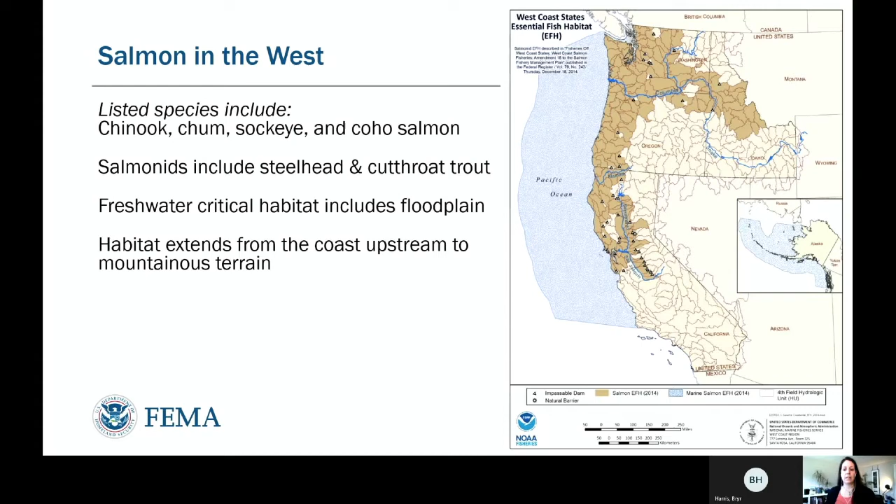These watersheds provide habitat for salmon upstream from the coast and into the mountains. Floodplains are important to fish because they provide shelter from fast-moving water during floods, and because the use of land near a river or stream determines whether fish will have the food, shade, and clean water they need to be healthy. So let's take a look at some of the communities existing alongside our salmon.

We'll zoom in a little closer to see the major channels for the freshwater habitat in the greater Puget Sound watershed. This map identifies each county in which NFIP communities are subject to the unique NFIP standards we're here to talk about today. In total, 122 participating communities are located within the Puget Sound watershed, and the participating municipalities on this watershed are shown in the map in blue.

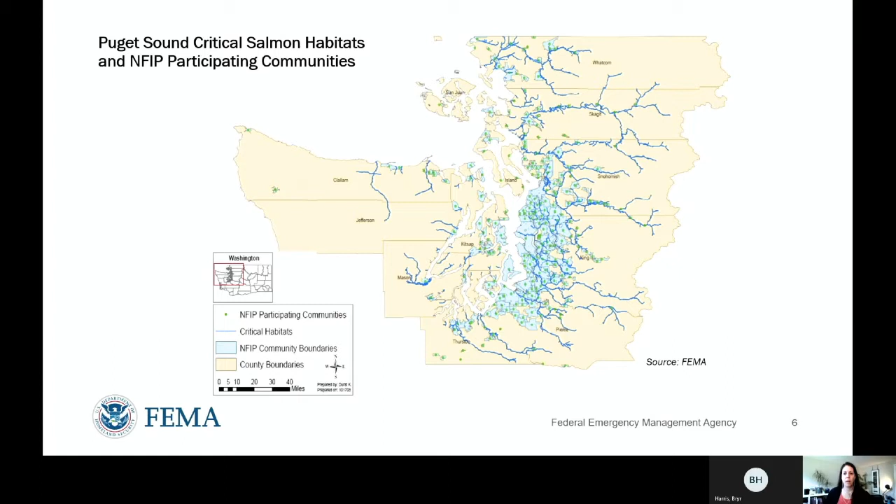The listed threatened and endangered species of concern in the Puget Sound watershed are shown here, and these are 4 salmonid species plus the distinct population segment of the southern resident killer whales.

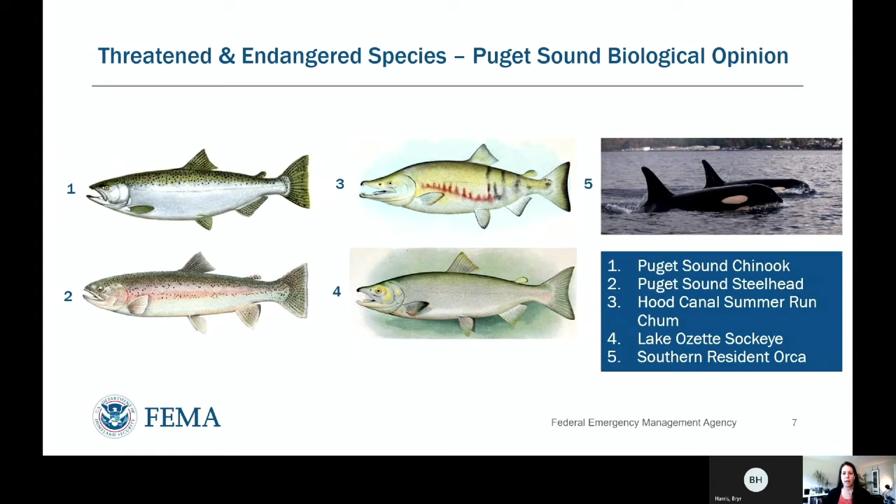Similarly, a separate biological opinion was issued by NOAA Fisheries for habitat impacts in the state of Oregon for the watersheds shown in tan here. Same as in the Puget Sound, the boundary of this impact is driven by natural and sometimes man-made obstructions, but the general area follows watersheds. The majority of NFIP participating communities within the state of Oregon actually fall within this boundary.

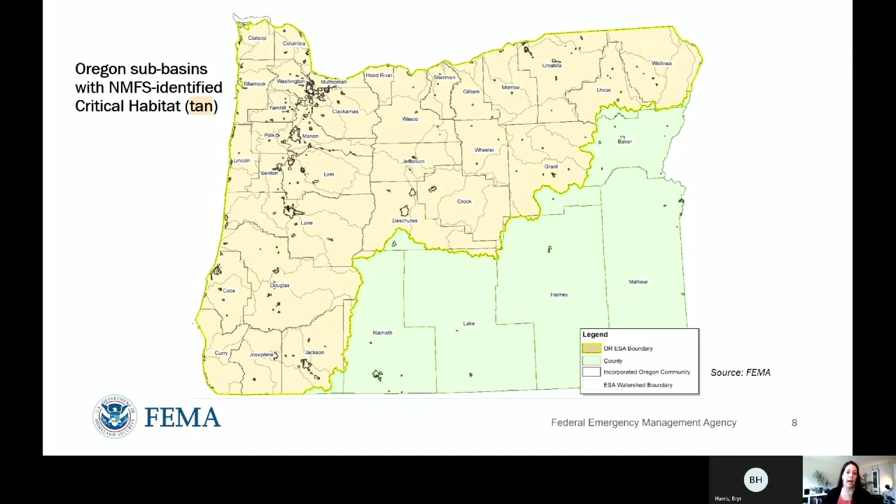So the species highlighted in the biological opinion for the state of Oregon are more extensive: the salmonids you see here, plus their subspecies, eulachon, which is a feeder fish, the green sturgeon, and again the southern resident killer whales are identified as impacted by the implementation of the NFIP.

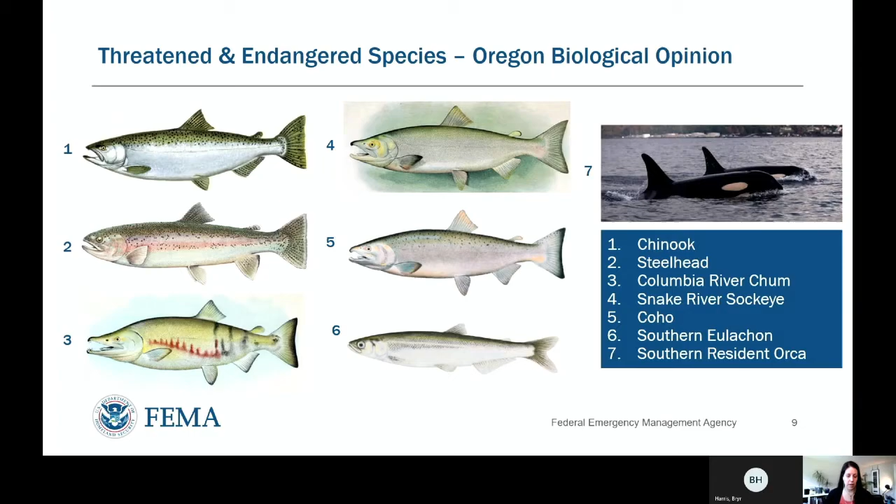So why are we talking about all of this? If you're not sure why the National Flood Insurance Program has to do with salmon, you're definitely not alone. It all has to do with the requirement of federal programs to comply with Section 7 of the Endangered Species Act. Let's dig into that a little bit.

As a federal agency, FEMA is required to ensure its actions through federal programs comply with the Endangered Species Act. The tricky part is that the NFIP is a voluntary program implemented locally by local governments. Because of this, participating cities, counties, and tribes permit floodplain development that can reduce the quality and quantity of fish habitat. As a result, in these specific two geographic areas, FEMA is looking to change what is asked of local and tribal governments as a condition of participating in the voluntary program.

This all comes back to language in the Code of Federal Regulations that states floodplain permits must be obtained for floodplain development and that the work must comply with ESA rules.

This became a highlighted issue in Washington and then in Oregon when litigation was brought to suggest that FEMA wasn't doing enough to address floodplain impacts on endangered species in these watersheds.

The path forward for clearing that question up is to proceed with a federal consultation between the action agency, in this case FEMA, and the services, in this case NOAA Fisheries. The goal of each consultation was to determine whether the minimum standards of the NFIP, as implemented by FEMA, jeopardize the continued existence of a listed species or result in the destruction or adverse modification of designated critical habitat of such species.

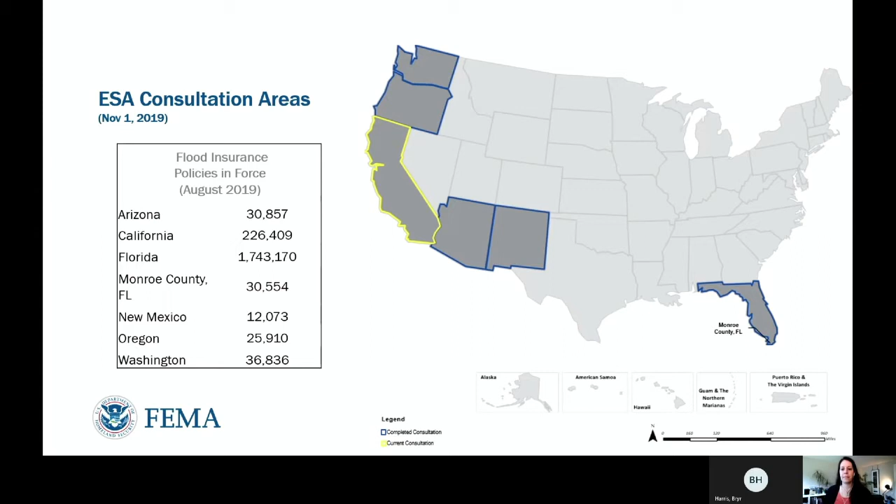So the blue outlined states you see here indicate where ESA consultations have been completed for NFIP implementation concerns regarding listed species, and the yellow outlined state, California, is where ESA consultation is already currently underway. My point here is that it's not just a Pacific Northwest problem, and it's not just a salmon problem. The California consultation is related to listed salmon species as well, but there are listed species living in coastal and riverine floodplains throughout the country that may be subject to future litigation.

Other consultations show us that it's not just fish. So hopefully what we share with you today can help you and your local floodplain partners work toward NFIP implementation that protects these critical habitat areas.

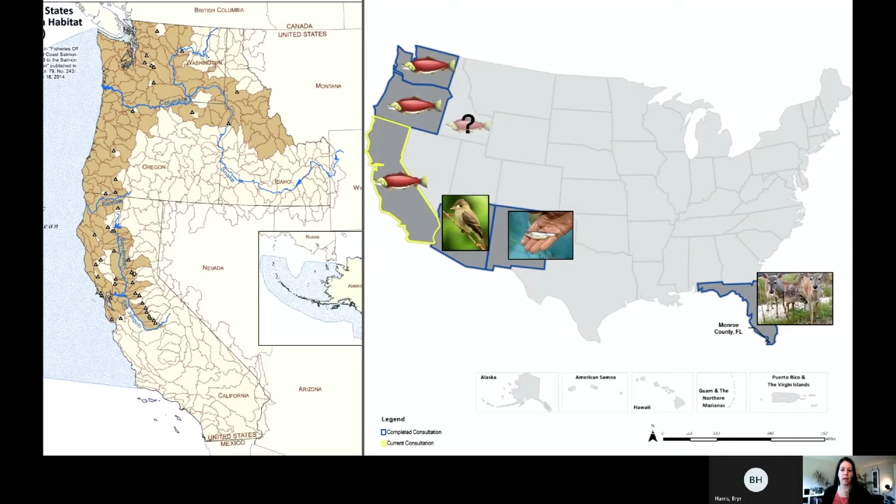After FEMA received the Jeopardy opinion and RPA from NOAA Fisheries, the team at Region 10 began developing a strategy to help local communities understand how their floodplain management responsibilities and authorities have been expanded by the findings of the BIOP. It's important to note that although the RPA pushed for systematic changes in the bedrock of the NFIP minimums, the NFIP is a national program, and any changes to the federal code would affect how the program operates nationwide. So it was up to Region 10 to develop robust guidance to support each unique community in devising a method for managing development in their SFHAs without further jeopardizing threatened species.

What we came up with is what we call the 3 doors. These are each voluntary levels of ordinance amendment that provide roughly 3 types of ESA compliance strategies. We'll break down each one for a bit more detail.

I'm going to start with door 3 because this is the default category that all Puget Sound communities are in until they adopt the ordinance changes characteristic to other strategies, door 1 and 2. Door 3 is known as the permit by permit approach. With no ordinance changes, the responsibility lies entirely on the permittee to ensure that every project proposal for development in the special flood hazard area includes rigorous analyses of all the potential impacts to the quality and function of the habitat of listed species at that location.

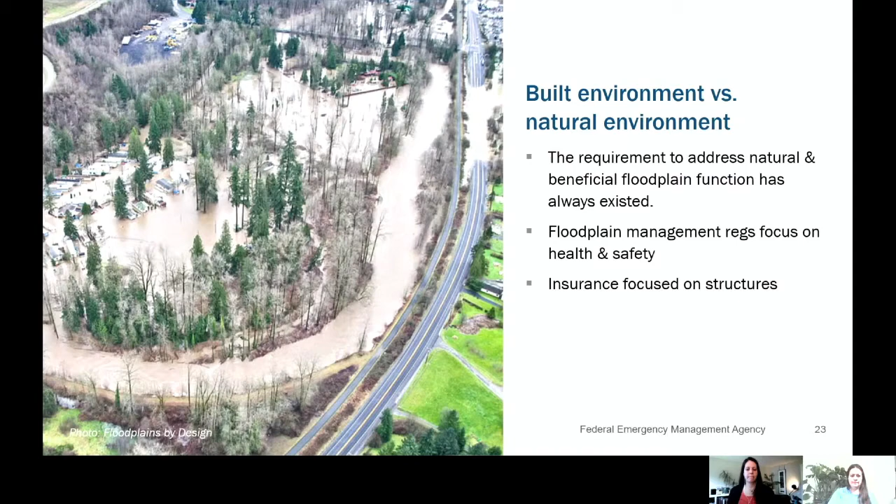Examples of the missing elements, the restoration and preservation of natural and beneficial functions of floodplains, include the fact that the NFIP definition of development does not specifically include habitat alteration. In the Puget Sound, we suggest communities adopt a certain percentage of vegetation removal as an addition to this definition. Another classic example is the room in basic floodplain management regulations for unrestricted volumes of fill in the floodplain, including the heavy armoring of shorelines and riverbanks, as long as the proper H&H study is provided.

If a community has not adopted its own regulations for the protection of natural and beneficial functions of floodplains, a reliance on the minimum performance standards required to participate in the NFIP may be far from adequate.

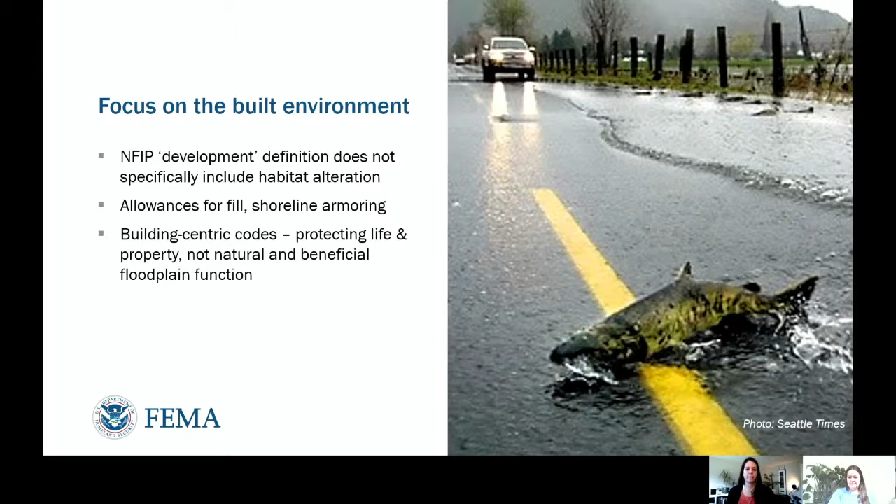So I'm going to pass it back to Erin now to look a little bit into the future, what looking downriver and floodplain management, both in the Pacific Northwest and possibly the nation, is going to look like from here on out. Thanks, Briar. So let's bring it home by looking downriver. As we look ahead to from where we are today, we're hopeful that a better awareness of habitat values and natural floodplain function will lead to healthier and safer riverfronts and shorelines far into the future.

In the Puget Sound, we're working on continuing our BIOP and RPA implementation and finding ways to improve FEMA's outreach strategies to the local communities. We're also working with our state partners on permitting requirements to make sure that policies aren't overlooked when permitting rules are put in place. And in Oregon, we're continuing with our stakeholder workshops, as I mentioned, and are working hard to make sure that the end result of that planning process is a tool that is designed to be used by and in Oregon communities and tribes.

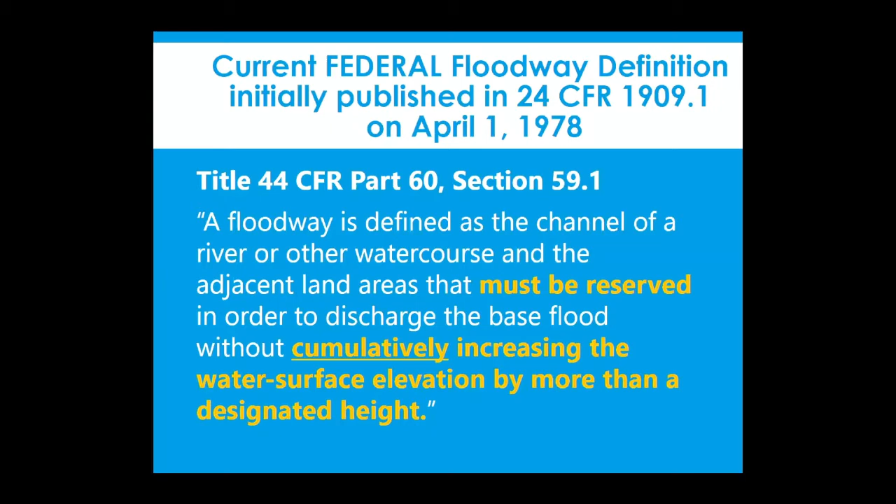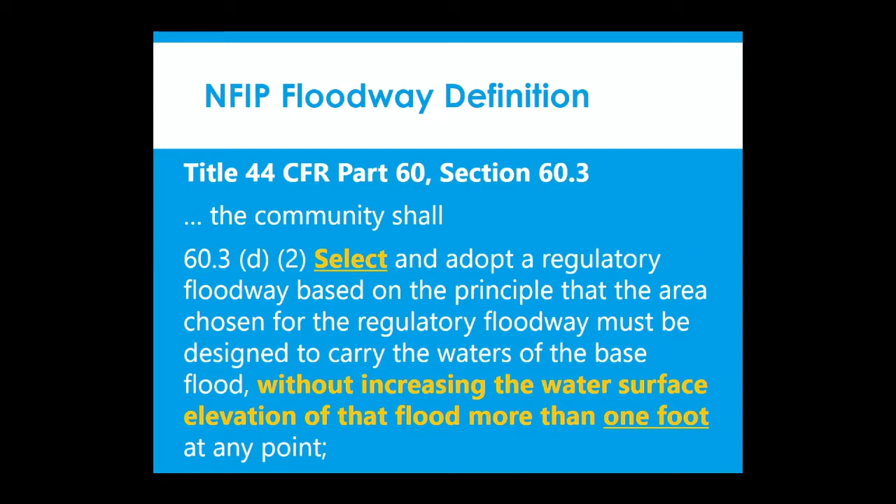Then in section 60.3, it highlights that the community shall select and adopt a regulatory floodway based on the principle that the area chosen for the regulatory floodway must be designed to carry waters without increasing the water surface elevation of that flood by more than 1 foot. We highlight 'select' here, and we'll talk about that a bit later.

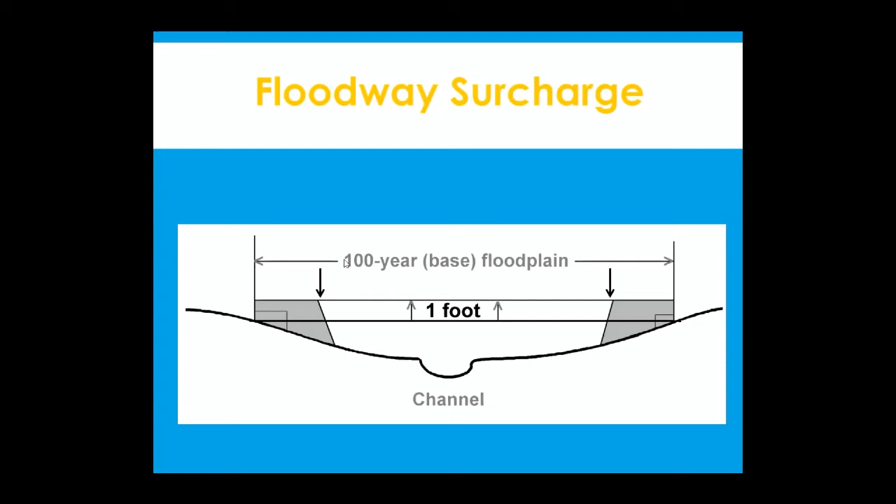So if you look at the cross-sectional area of a stream, in one-dimensional modeling, that's what they usually do with stream cross-sections, usually a HEC-RAS model these days. They would block off each side of that cross-section, and as that blockage would occur, that would pinch the flow in and create this rise. Once it met this 1 foot, that would establish where the edge of the floodway would be, and the rest would be flood fringe.

Floodway and flood fringe. The issue is that, of course, that flood fringe, that increase, and by the way, that 1 foot surcharge is not added to the base flood elevation. You'll probably hear that from me several times here. That extends outside the special flood hazard area as that fringe gets filled.

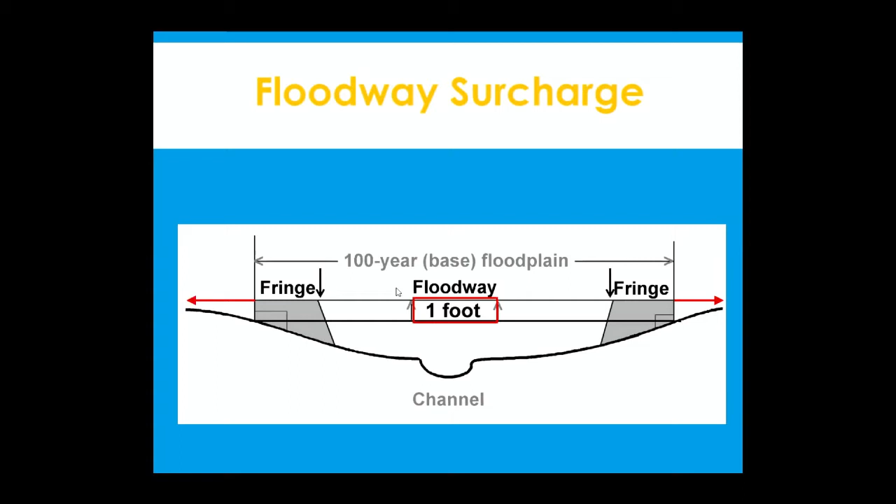Here's another view of that. Again, the flood fringe. The key thing when it comes to impacts is really that the floodway is a good concept, but the issue is this extensive amount of flood fringe that's now open to development with no analysis becomes available.

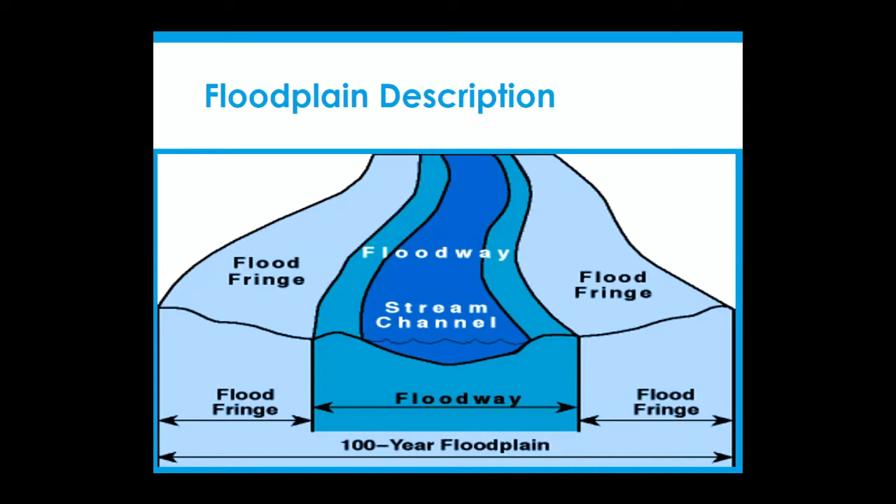Now, some of the graphics you'll see associated with this floodway surcharge are inaccurate because, as you can see, this surcharge goes up to here, but that surcharge really extends out into the flood fringe in the real world. This engineering model will have these frictionless walls created to create that surcharge, but that surcharge will actually go out into the flood fringe.

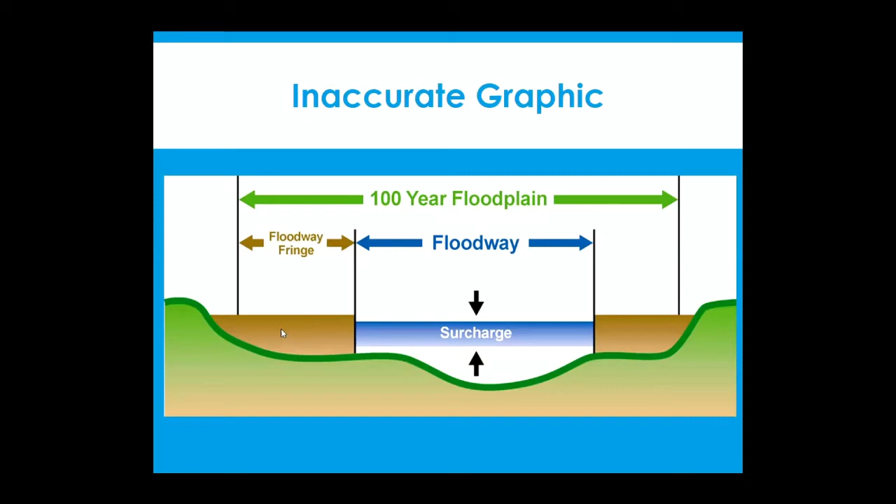Here's another inaccurate graphic showing a surcharge and then an encroachment, but it implies that this encroachment goes up above the surcharge, where really that encroachment will only be filled to the base flood elevation.

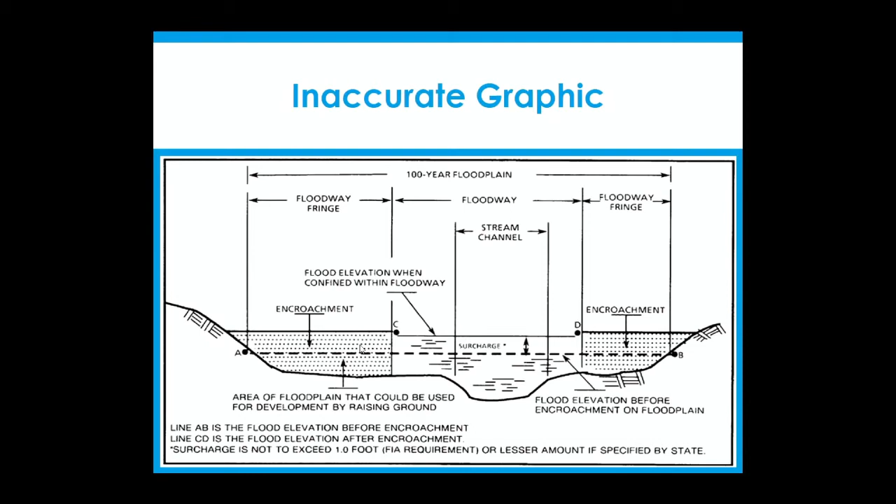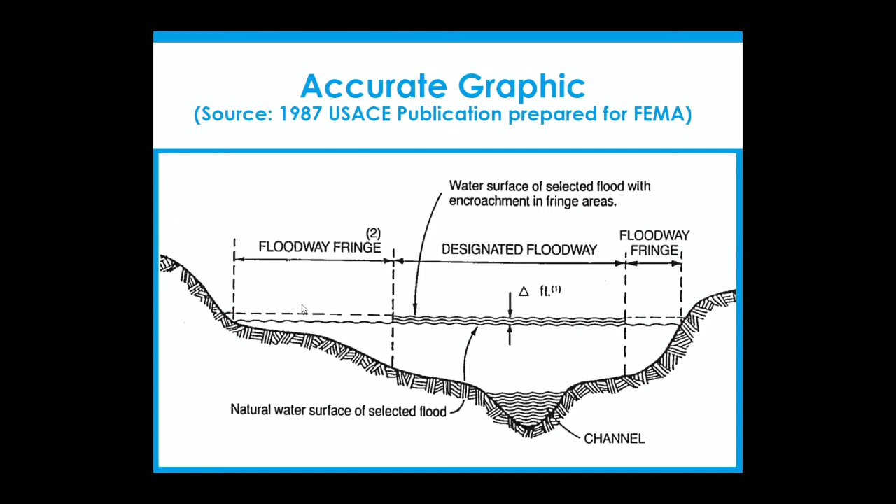Here's a much better graphic that shows that water surface elevation, that 1 foot here, this delta is 1 foot. This graphic was prepared by the Corps of Engineers for FEMA in '87, and shows that surcharge will extend into the flood fringe and actually out beyond the special flood hazard area, so much more accurate. Here's a perspective view.

There's that surcharge, and it shows being contained within the floodway, but really once that filling occurs, that flooding will go into the flood fringe area.

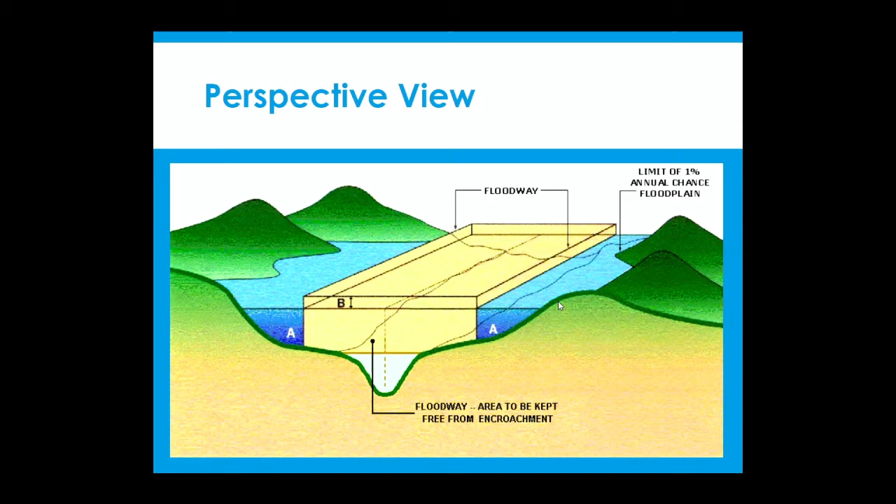So why was this concept of floodway surcharge established? Well, there's a seminal report prepared by James Goddard. James Goddard and Gilbert White are the two people named in the ASFPM Goddard-White Award. In 1978, he summarized the history of how that rationale and origin occurred, back in the 1950s when he was at the Tennessee Valley Authority, so he knows that history.

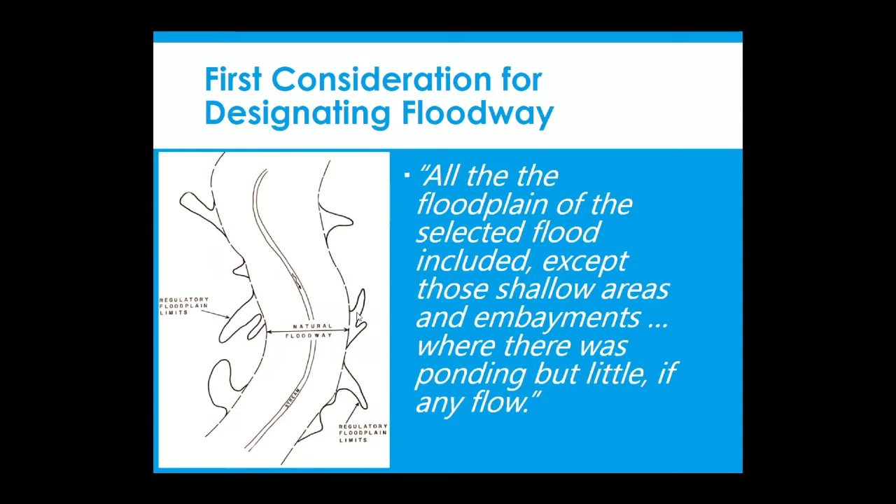He said the first consideration in this report was that when designating floodways, all of the floodplain of the selected flood would be included, except those shallow areas and embayments where there was ponding but little, if any flow. So the concept would basically be the natural floodway where there's moving water.

However, this was in the Tennessee Valley, with steep slopes, and some people pushed back, saying if we can't develop in the floodplain, we won't have any area to develop because of the steep slopes. So there was a compromise, some pushback, and the compromise was to allow some development, with an approach allowing encroachment provided it would not cause an unreasonable increase in flood heights. That evolved into being no more than 1 foot.

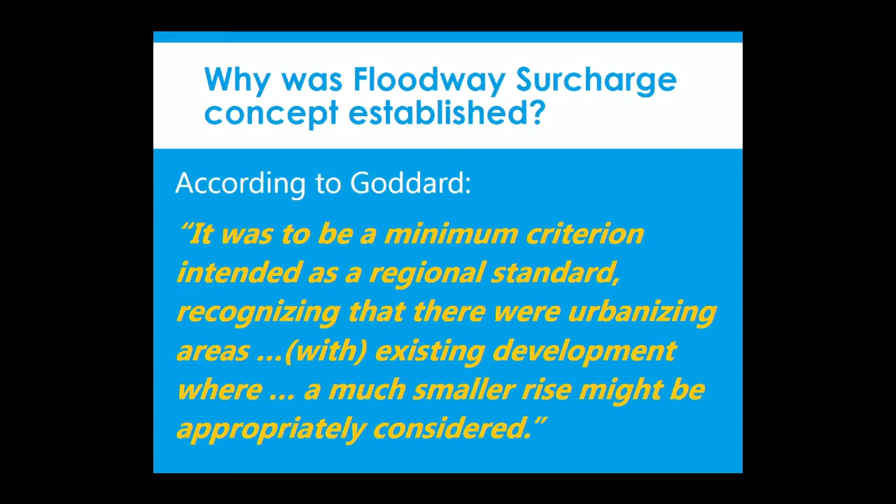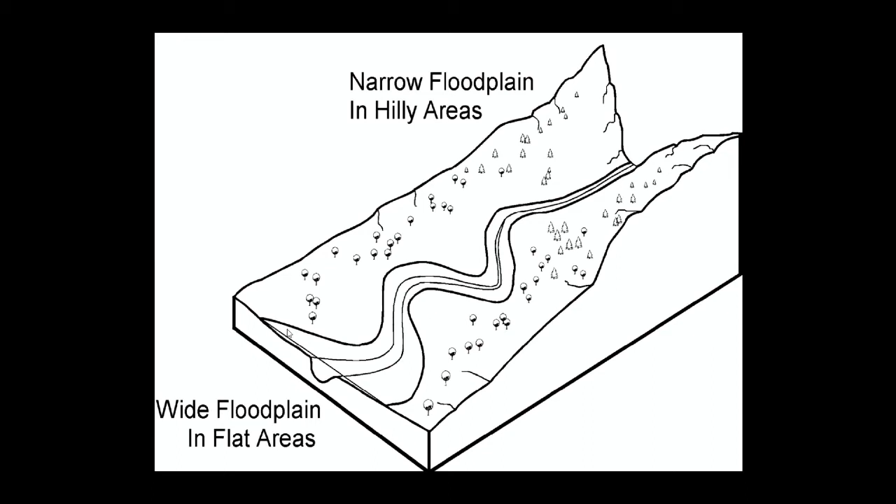But he highlighted that it was meant to be a minimum criteria intended as a regional standard, applying especially in hilly, steep slope areas, recognizing that for urban areas with existing development, a much smaller rise might be appropriately considered. Here's a good graphic on that—obviously in hilly areas a 1 foot surcharge wouldn't extend very far, but in wide, flat floodplain areas it would go a long, long way.

We also found a historic policy memorandum by Nicholas Lally, highlighting that according to FEMA, the floodway's express purpose was to provide a tool to ensure new development will not cause any—emphasis added—adverse impact on existing development. Recognizing development pressures and engineering judgment applied, the FIA concluded that adverse impact would result when the flood profile was at least 1 foot higher.

But he went on to say, bear in mind this was intended to be a national standard, and again highlighted that in many urban areas, with the density of existing development, any measurable rise—not emphasis added, this is the memo—might be considered adverse by existing occupants. So the early intent was that this would apply in certain areas, but where there's a lot of existing development, a much higher standard would be appropriate.

By the 70s, a number of states had floodplain management programs and established surcharges less than that 1 foot. Four states adopted a standard based on the concept of measurable, and at that time the Corps of Engineers modeling produced output at the 1/10 of a foot, so that's what was established.

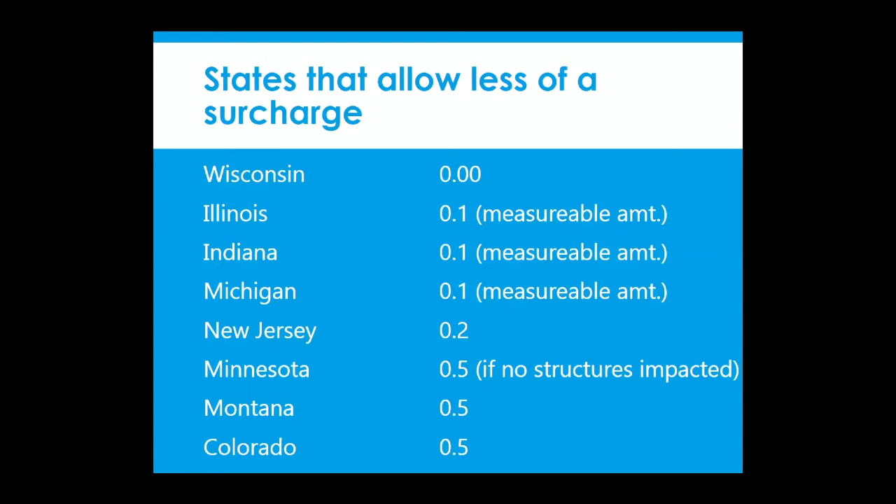In Wisconsin, when the Corps started producing outputs in hundredths of a foot, they went to a higher standard, designated today as 0—so they have 0 surcharge floodways. Seven other states took intermediate or compromise approaches; Minnesota allowed a 1/2 foot if there were no structures impacted. There are some really interesting quotes in Goddard's report where he interviewed states.

Illinois said the overbank floodplain of most streams in Illinois is quite flat—a small increase can significantly expand the width of the floodplain. It's unreasonable economically to allow any increase that subjects previously safe structures to floodwaters. So again, focused on this no measurable amount standard.

Indiana gave a similar quote: there are few topographic restraints on development in Indiana, so there's no real need to view floodplains as the only developable area. Again, if you're in a mountainous area you may need that, but elsewhere there's really no need to view that as a developable area.

Now, what about communities in other states? FEMA does have guidelines saying state higher standards take precedence. However, they had an issue where a community wanted a zero surcharge floodway, and then when the preliminary map came out, there was a new mayor who said, no, we don't want that.

So as of November 2019, communities can also request a more restrictive floodway.

However, other than those 8 states, it's been FEMA's policy to map a floodway using the 1-foot surcharge. They put that floodway on the FIRM. They say they'll do another one and give that to the community, but what shows up on the FIRM is that 1-foot surcharge floodway. They did that primarily to avoid having to redo the floodway map.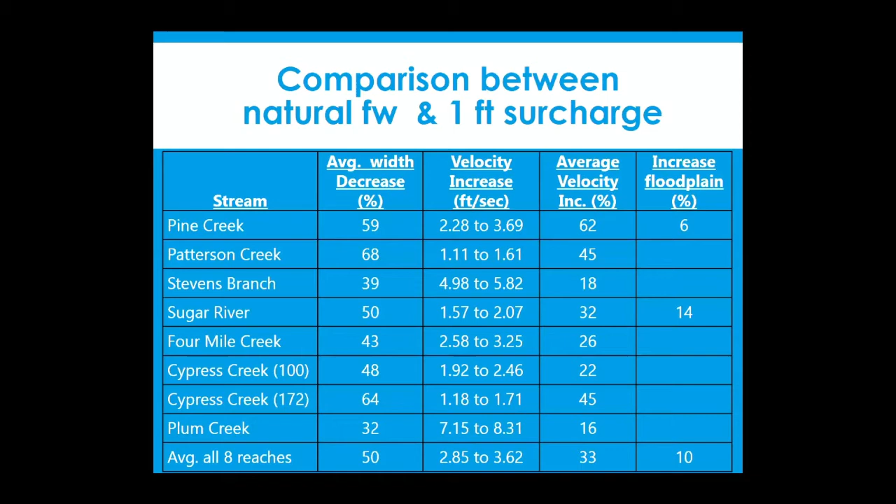I worked in Wisconsin for many of my years, and with the zero surcharge floodway, I was really surprised how significant a 1-foot surcharge shrunk the width of the floodway. On average, it shrunk it by 50%, increased the velocity by 33%, and increased the size of the floodplain by 10% on average.

We only had 2 examples where we mapped the increase, because that's where we had topo that would allow us to do that. So it's not a very representative or statistically valid analysis, obviously, but it did give us a little bit of a peek at how much larger it makes the floodplain.

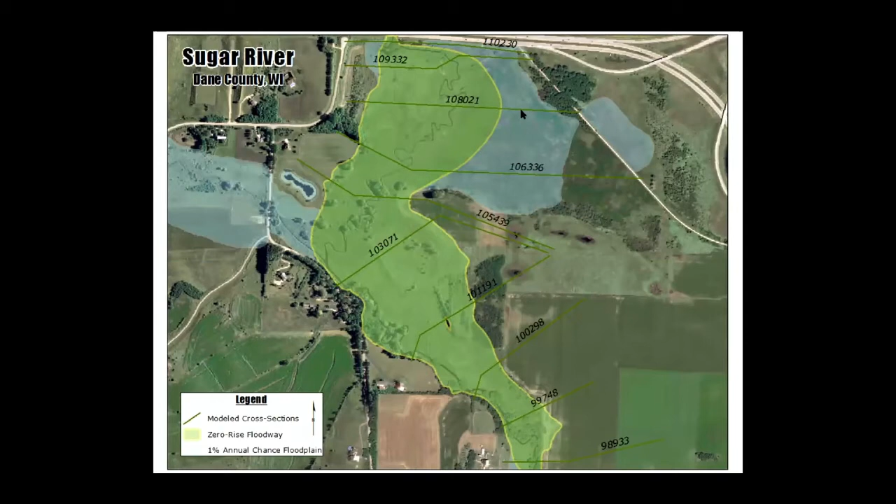Here's an example from Wisconsin, in Dane County. This is a zero surcharge floodway, and you can see there's still some flood fringe mapped here. But now look at the 1-foot surcharge - notice how much that shrinks the natural floodway to reduce the width. The red line shows the amount of increased area that will get flooded over time as that flood fringe gets filled.

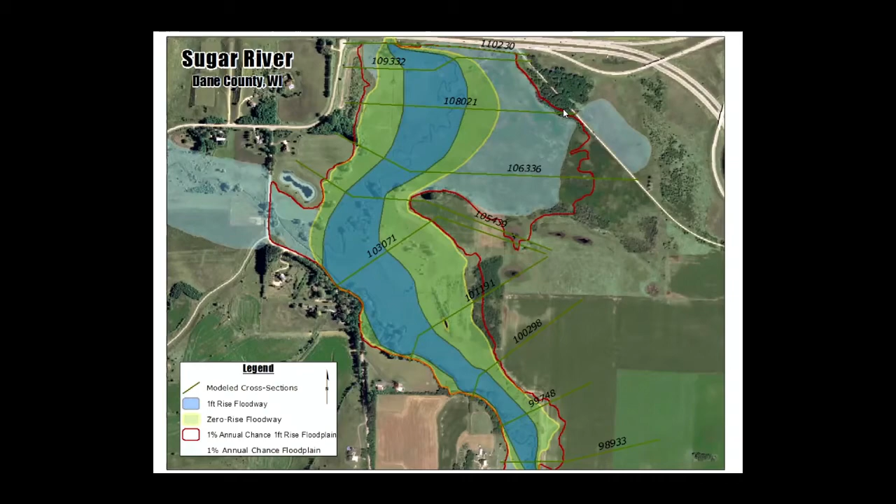So again, the big issue with the 1-foot surcharge is that the floodway concept is a good one because it has restrictive standards for building in the floodplain. But it opens up that flood fringe to be filled with no analysis of the impacts.

Now this graphic shows that surcharge not going here, and here's a new house that's been built on fill up above the base flood elevation, so that's not flooded - but that's not really the way it works.

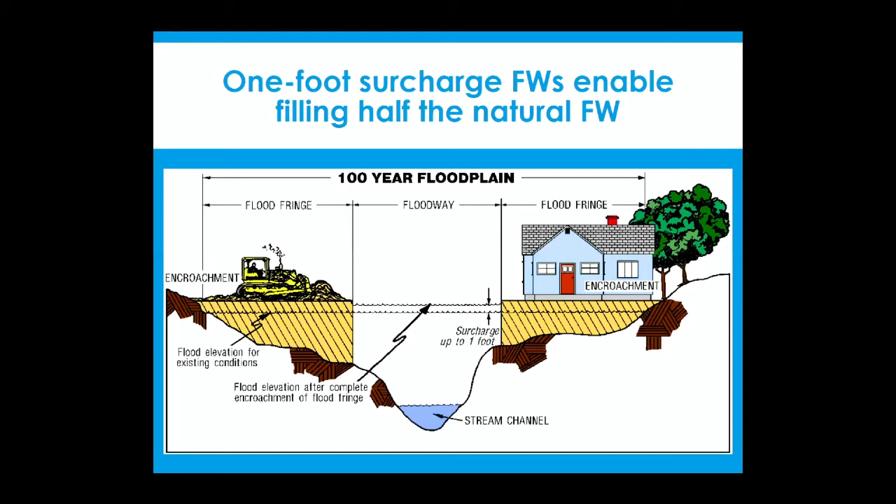If you look at the effects of fill in the flood fringe, this is a better analysis because it shows existing development will get flooded by this 1-foot surcharge, but also you can see it floods this new development because that's only built to the base flood elevation, and the surcharge is not added to the base flood. The logic is this is a flood insurance program, and you can't require insurance based on future conditions, according to legal at FEMA.

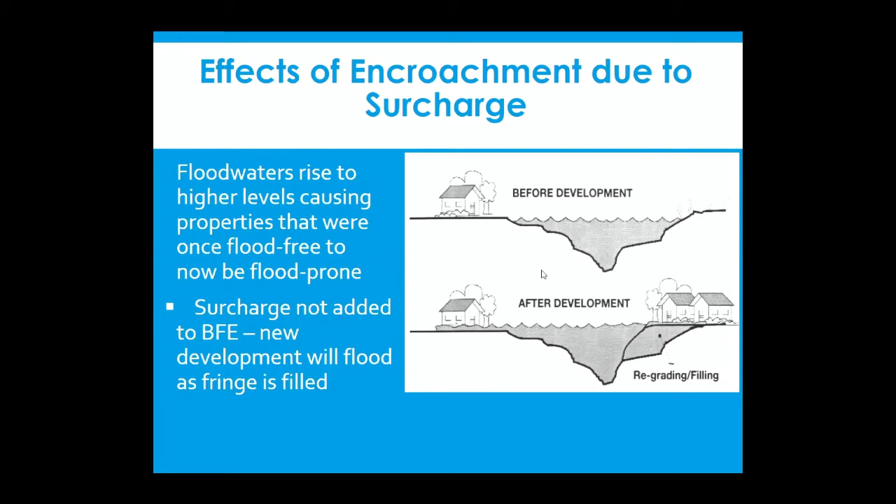So that 1 foot was deemed reasonable and not significant. But here, if you look at this Corps of Engineers flood depth damage curve - here's 1 foot of surcharge - if you go up to about here, that's 23% of the structure that will be damaged by 1 foot of flooding. So if you have a $100,000 house, that's $23,000 worth of damage. If it's a $1 million house, that's $230,000 worth of damage on that structure.

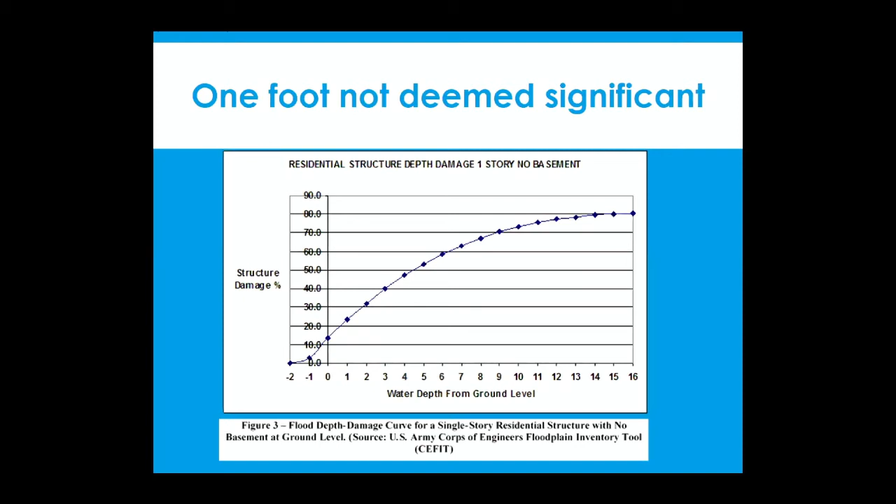That seems pretty significant. I did get a kick out of this FEMA tote they provided at ASFPM in Cleveland, that highlights the potential impacts of a bit of flooding - here it just talks about 1 inch. So the impacts of fill on the natural floodway: it increases velocities, a higher flood hazard that's deeper and higher, moving faster. It also causes more erosion potential of the stream.

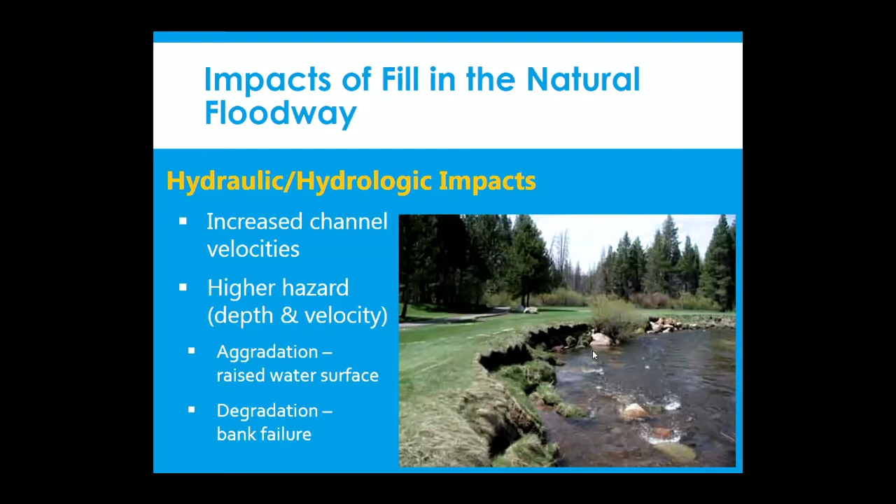So we looked at the guidelines, and one of the things we highlighted is that it says there should be a floodway coordination meeting where you discuss the floodway concepts with the community. I'm not sure that's happening regularly.

In the CFR, we noted earlier that a community shall select and adopt a regulatory floodway. If you look at what Webster says the meaning of select is, it means when you're given options to choose the best for your purpose. Minnesota has the best practice I'd like to highlight here.

What they do is have a half-foot surcharge, and they will allow that as long as it will not materially increase flood damage potential. They interpret that as no increase allowed if there's an existing insurable structure impact. So much of the urban areas of the Twin Cities have zero surcharge floodways because there's such a significant amount of existing development that would be impacted.

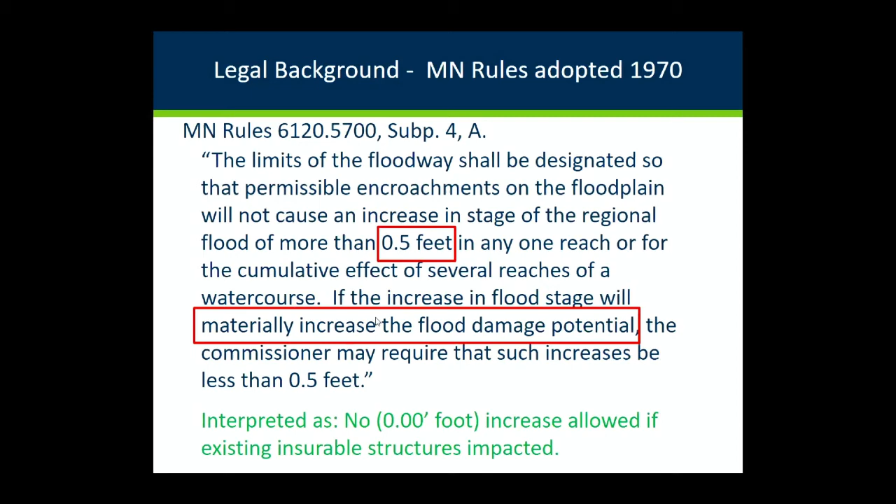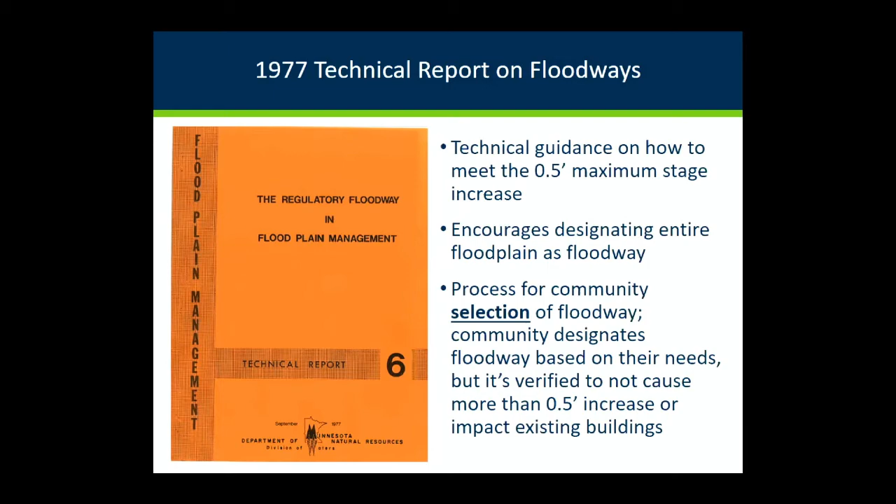It makes logical sense for FEMA too, since they're underwriting the flood insurance for communities in the special flood hazard area. So we've got some recommendations on limiting the impacts of surcharge. One is to have a floodway coordination meeting with the community where you give them options. Have the community select the floodway, and in our opinion, they should be given the option to select the surcharge, promoting a zero surcharge floodway.

And then if they do go with that surcharge, they should be required to notify owners of structures that are impacted, similar to the conditional letter of map revision process. Which makes sense—if you're going to create a map that's going to cause some flooding for existing development, they should probably be notified of that impact.

Going further, we use the basic better no adverse impact approach like we do in much of our no adverse impact analyses. The better approach is to do a risk assessment where you provide a fully encroached map to show what additional inundation will be caused by that surcharge—how much area is going to additionally get flooded because of this. If you're in the Red River of the North, the Dakotas, that's going to go a long ways.

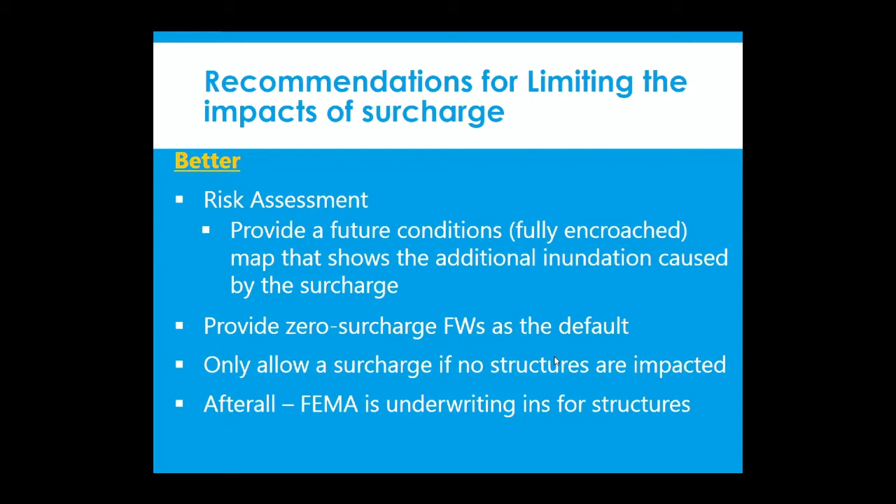Again, here we suggest providing the zero surcharge floodway as the default, and only allow a surcharge if no structures were impacted. After all, FEMA is underwriting the insurance for these structures.

We've also listed a no adverse impact approach—in Wisconsin, a good best practice is that Wisconsin has a zero surcharge floodway. They will allow a surcharge floodway for certain encroachments, but they require easements to be obtained from property owners impacted by surcharge. This could be bare land, but if they are going to be impacted by having some flooding on their property, easements are required.

We also suggest that if you're going to do a Hazus run, do it for the BFE plus the BFE and surcharge—again, the BFE is not added to the surcharge. By giving two Hazus runs, you actually end up with a monetary amount of that increased damage that's going to potentially occur as that fringe is filled.

The other issue is managing development in the floodway, and one of the concerns we have is that FEMA's approach now is that since you have to do a zero rise analysis for any proposed encroachment, there can be no cumulative impacts because 0 plus 0 equals 0. In actuality, most people know that the sensitivity of the modeling is such that it is not really 0—there's a little bit of an impact that the computer program may not be able to pick up. So 0 plus 0 plus 0 does not equal 0.

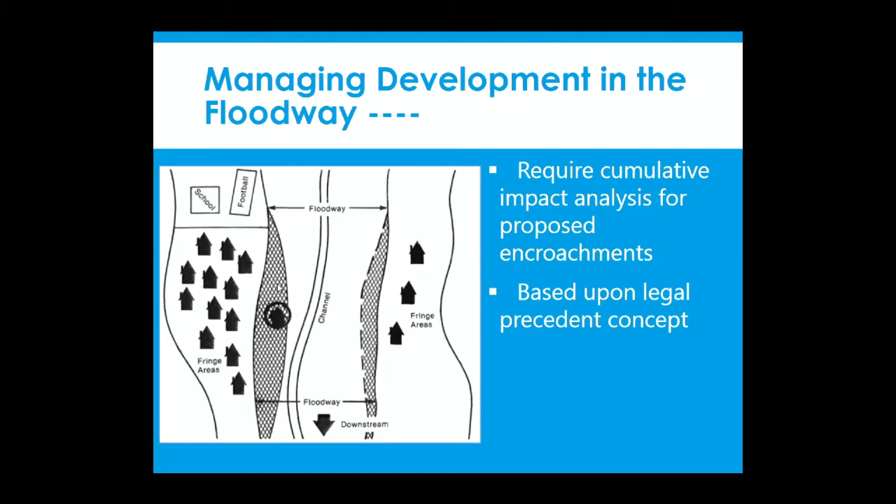Specifically, once you allow somebody to encroach 100 feet into the floodplain, you can't deny the next person to do the same thing—so you've established a legal precedent. Here's a great graphic from a historic FEMA document that depicts that, an excellent graphic showing that. We also wanted to highlight a best practice.

The city of Brevard in Transylvania County, North Carolina—which, by the way, I get a big kick out of, Transylvania County. I didn't know there was such a county, but it is.

Instead of a no-rise certification, they require a no adverse impact certification associated with any proposed encroachments, meaning no increase in elevation, velocity, or erosion. So as an engineer, if I'm given the task of showing a no-rise by changing the Manning's N—cutting down vegetation and paving something—I can show a no-rise, but I can't show no increase in velocity. So it really more effectively is a restriction on development in the floodway. Again, it's not a restriction that says you can't develop, it's a performance standard based on both elevation and velocity.

So finally, the other thing to really look at for managing development is you should be looking at loss of storage, and also make sure there's no impacts on floodplain habitat.

ASFPM has developed some no adverse impact how-to guides. I'd like to highlight two of them here. If you go to the ASFPM website and click on no adverse impacts, you can get to these guides—I think seven have been developed. Here are two specifically related to these issues: one on hazard identification and floodplain mapping, and the other on regulations and development standards.

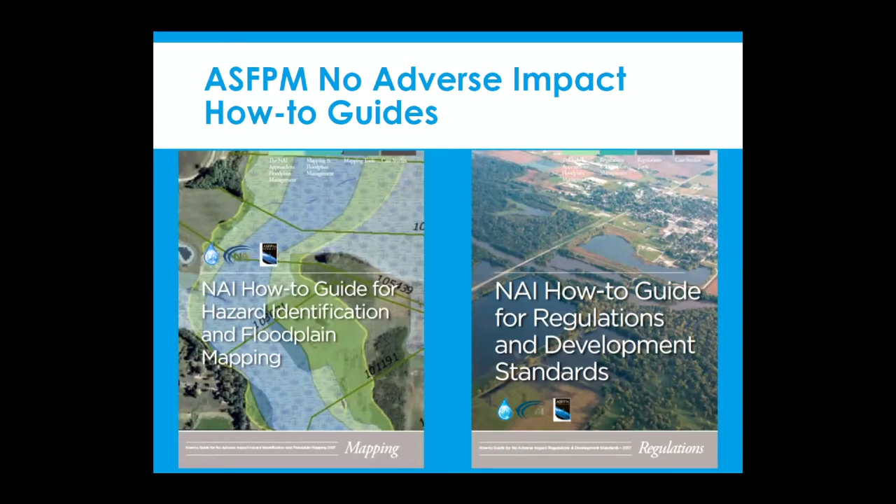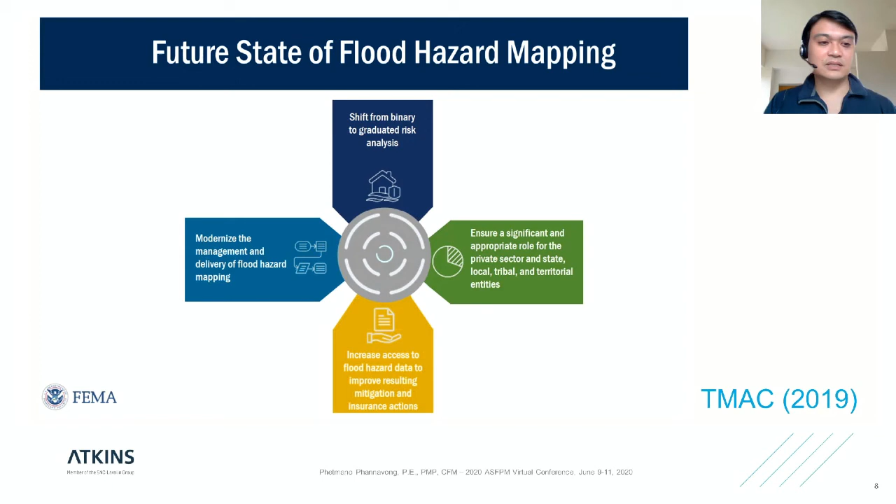For the future of the 100-year standard, we need to look at the program more comprehensively, by rethinking what are the roles and responsibilities of local and state government besides the federal government, and what are the minimum requirements for the program for the community to participate.

What I'm talking about here is, my view is that the new standard may not necessarily be a higher standard, like a 500-year standard or any higher kind of standard, but maybe we need to look at a different standard altogether that helps achieve the goal of the program.

A new minimum, I call it new minimum NFIP standard, may consider multiple hazards, such as urban flooding, the future condition flood hazard, in order to manage this flood risk in a more holistic approach, and also look at it as structure-level risk rather than by zone, as we have now.

This concept can be possible now because of the technology and science. It has been improved and has been utilized and made available to us to use, that were not available back in early 2000 or even 5 years ago.